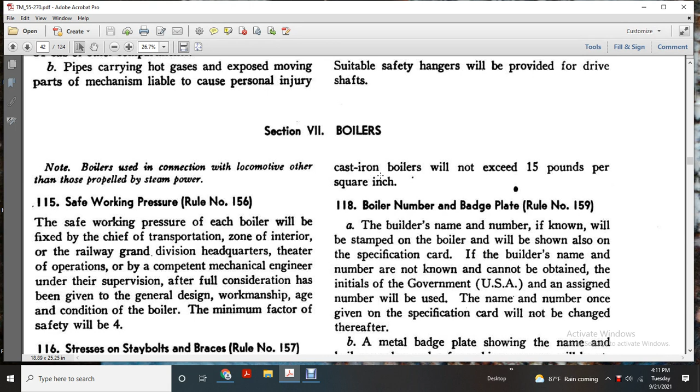Alright, Section 7, Boilers. Note, boilers used in connection with the locomotive other than those propelled with the steam power. Safe working pressure. Rule number 156. Safe working pressure. Each boiler will be fixed with the Chief Transportation Zone interior of the Railway Grand Division Headquarters Theater operation or by competent mechanical engineer under the supervision.

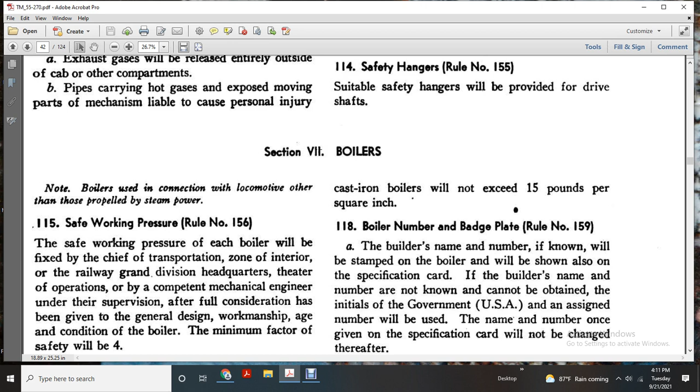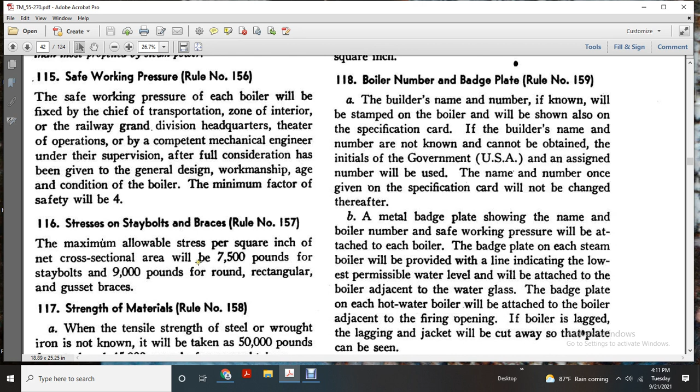After full consideration has been given the general design, workmanship, age and condition of the boiler, minimum factor of safety will be 4. 116. Stress on stay bolts and braces. Rule number 157. The maximum allowable stress per square inch on a net cross-sectional area will be 7,500 pounds for stay bolts, 9,000 pounds for round rectangular gusset braces.

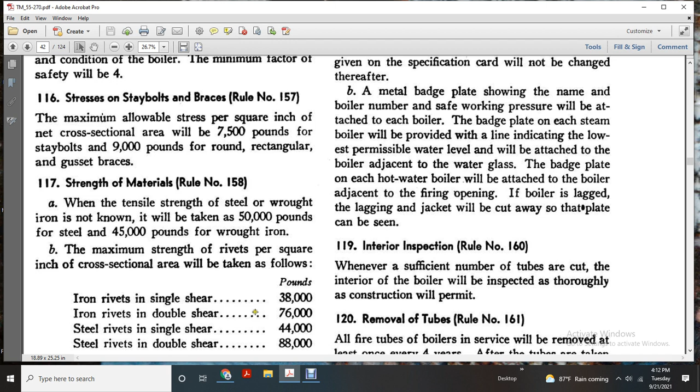117. Strength of the materials. Rule number 158. When tensile strength of the steel or wrought iron is not known, it will be taken at 50,000 pounds for steel and 45,000 pounds for wrought iron. The maximum strength of the rivets per square inch of cross-sectional area will be taken as follows. Rivet single shear 38,000, double shear 76, steel rivet single shear 44, double shear 88.

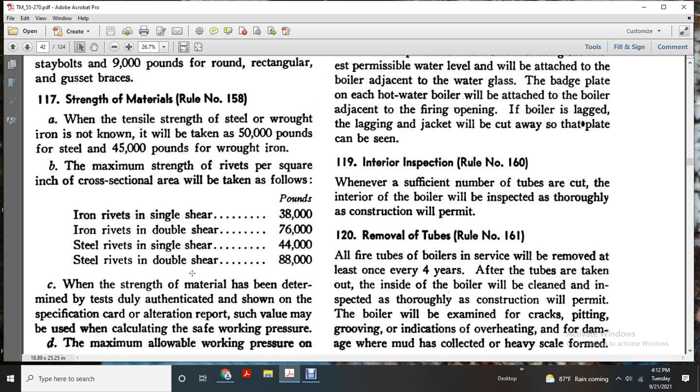When the strength of the material is determined by test of duly authenticated shown over the specification, alteration report such value when calculating the safe working pressure. Maximum allowable working pressure on cast iron boilers will not exceed 15 pounds per square inch.

118. Boiler number on a badge plate. Rule number 159. The builder's name with the number, if known, will be stamped on the boiler and shown on the specification card. If the builder's name with the number is not known or cannot be obtained, the initials of the government, USA, and an assigned number will be used. The name and number once given on the specification card will not be changed thereafter.

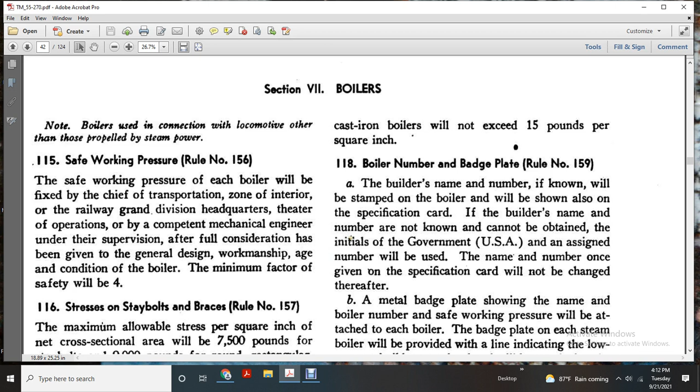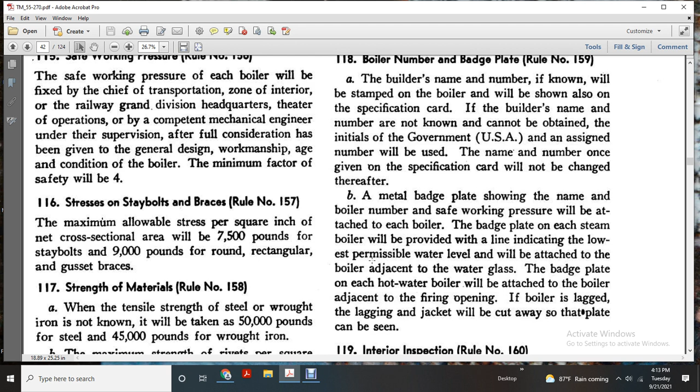A metal badge plate showing the name of the boiler with the number and the safe working pressure will be attached to each boiler. A badge plate with each steam boiler provided with a line indicating lowest permissible water level will be attached to the boiler adjacent to the water glass. The badge plate with each hot water boiler will be attached to the boiler adjacent to the firing opening. The boiler's lagging jacket will be cut away so the plate can be seen.

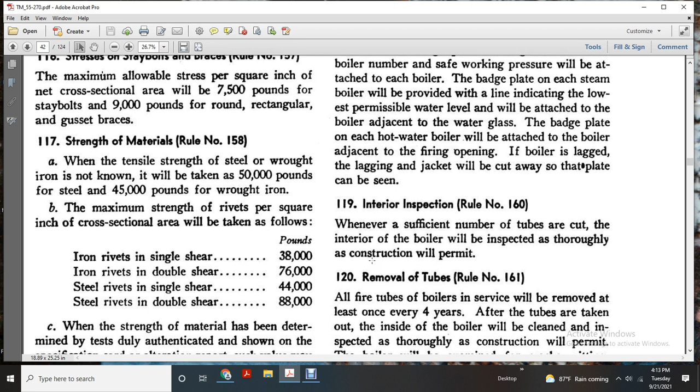119. Interior inspection. Rule number 160. Whenever a sufficient number of tubes are cut, the interior of the boiler will be inspected as thoroughly as construction will permit. 120. Removal of tubes. Rule number 161. All fire tubes of the boiler will be removed at least once every 4 years. After the tubes have been taken out, the inside of the boiler will be cleaned and inspected thoroughly as the construction will permit.

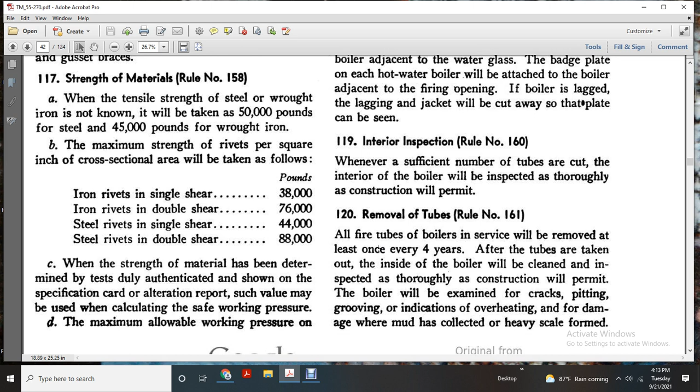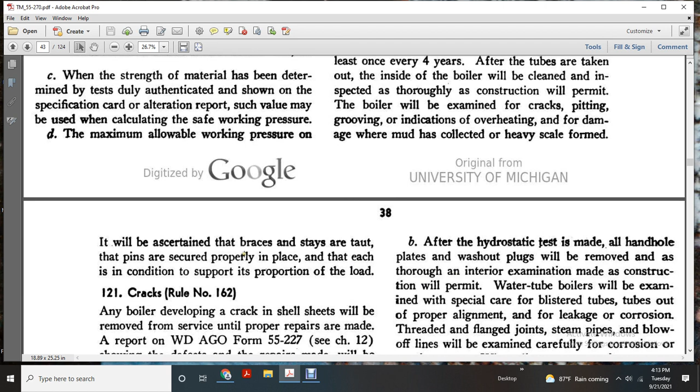Boiler will be examined for cracks, pitting, grooving, and indication of overheating and damage wherever mud has collected or heavy scale formed. It will be ascertained that the braces and stays are taut, with the pins secured properly in place, and that each is in condition to support its proper proportion of the load.

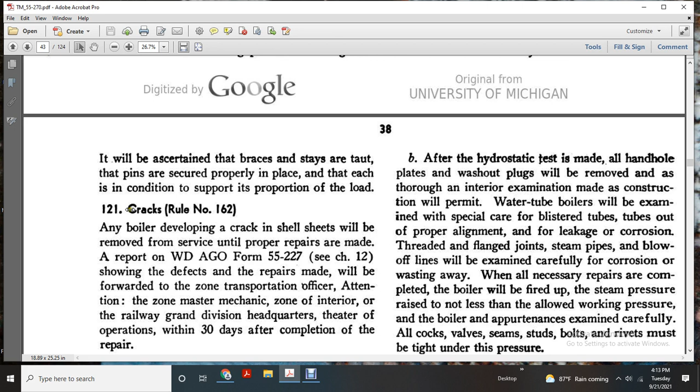121. Cracks. Rule 162. Any boiler developing a crack in the shell sheet will be removed from service until the proper repairs are made. A report on WD AGO Form 55-227, Chapter 12, showing the defect and the repairs made will be forwarded to the zone transportation officer, attention zone master mechanic, zone interior, or the railway grand division headquarters, theater of operations, 30 days after the completion of the repair.

Fusible plugs. 122. Rule number 163. Boilers equipped with a fusible plug will be filled with tin of not less than 99% purity, containing no more than 1/10 of 1% of lead and no more than 1/10 of 1% zinc. Fusible plugs will be removed and refilled at least once every year and such action will be shown on the report of inspection,

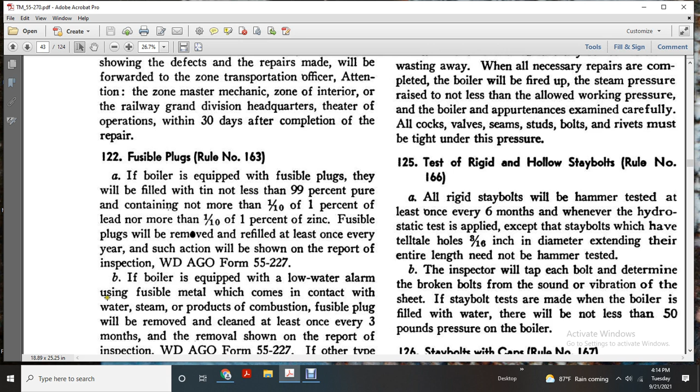AGO Form 55-227. If the boiler is equipped with a low water alarm using fusible metal which comes in contact with the water, steam, or products of combustion, the fusible plug will be removed and cleaned at least once every 3 months. Removal is shown on the report of inspection, AGO Form 55-227, and any other type of low water alarm used will be inspected and tested at least once every 3 months, with the condition shown on the report of inspection, AGO Form

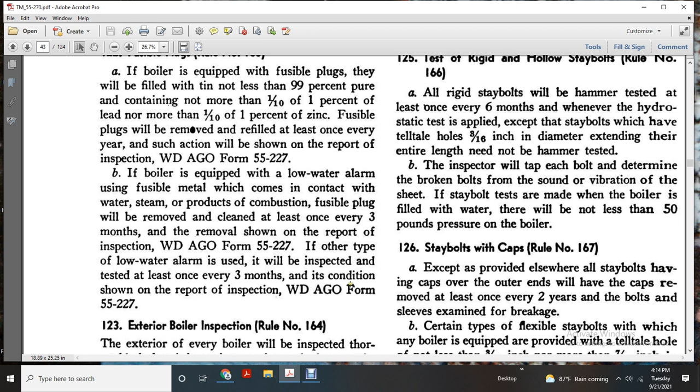55-227. 123. Exterior boiler inspection. Rule number 164. The exterior of every boiler will be inspected thoroughly before it is put in service whenever the jacket, lagging, or casing are removed.

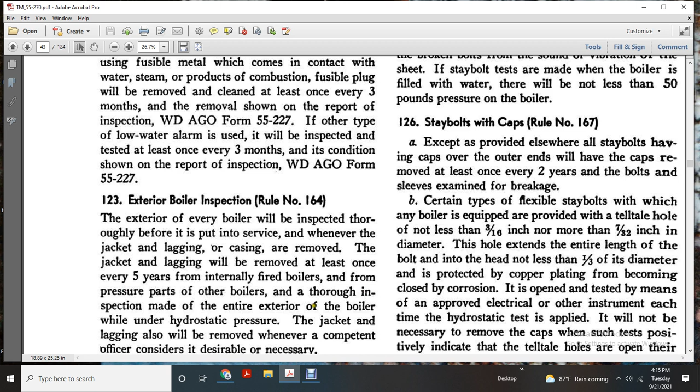The jacket lagging will be removed at least once every 5 years. For internally fired boilers, the pressure parts of other boilers will be thoroughly inspected, with the exterior of the boiler under the hydrostatic pressure. The jacket with the lagging will be removed whenever the inspector considers it desirable and necessary.

After the hydrostatic test is made, the hand hole plates and washout plugs will be removed and a thorough interior examination made as the construction will permit. Water tube boilers will be examined with special care for blistered tubes, tubes out of proper alignment, leaks, and corrosion. Flange joints, steam pipes, and blow-off lines will be examined carefully for corrosion wasting them away.

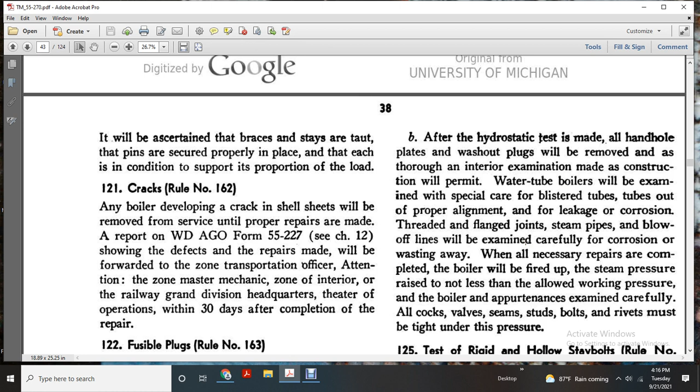When all necessary repairs are completed, the boiler will be fired up to a pressure not less than the allowable working pressure of the boiler, and the inspector will examine carefully all cocks, valves, seams, studs, bolts, and rivets, which must be tight under this pressure.

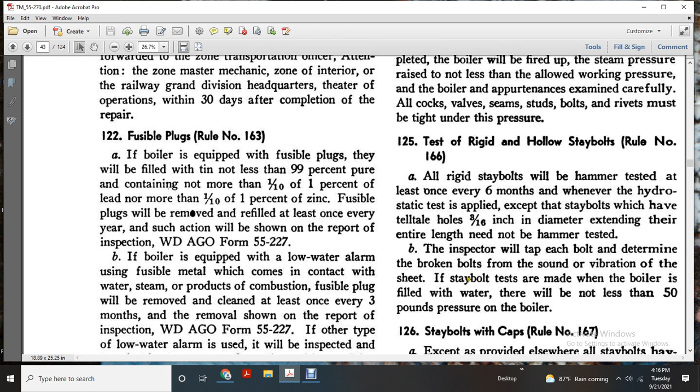125. Test of rigid and hollow stay bolts, rule number 166. All rigid stay bolts will be hammer tested at least once every 6 months and whenever the hydrostatic test is applied, except stay bolts having a telltale hole 3/16 of an inch in diameter extending their entire length, which are not to be hammer tested. Inspectors will tap each bolt to determine broken bolts by the sound or vibration of the sheet. If stay bolt tests are made when the boiler is filled with water. There will be not less than 50 pounds of pressure on the boiler.

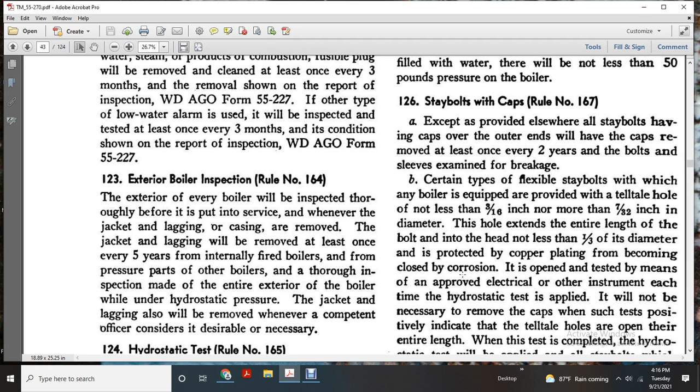126. Stay bolts with caps, rule number 167. Except as provided elsewhere, stay bolts that have caps over the outer end will have the caps removed at least once every 2 years, and the bolts and sleeves examined for breakage. Certain types of flexible stay bolts may be provided with a telltale hole not less than 3/16 of an inch nor more than 7/32 of an inch in diameter, extending the entire length of the bolt and into the head not less than 1/3 of its diameter, protected from becoming closed by corrosion, opened and tested by means of an electrical or other instrument each time the hydrostatic test is applied.

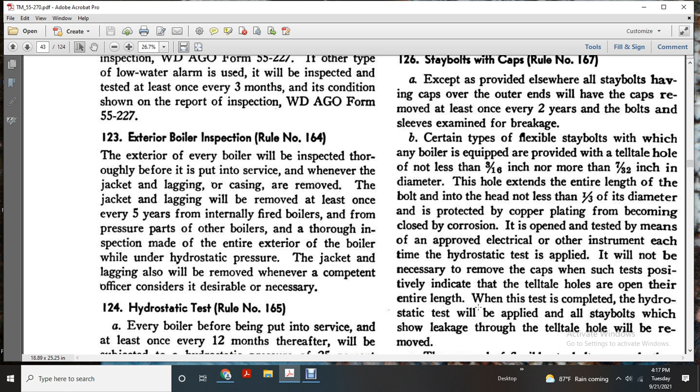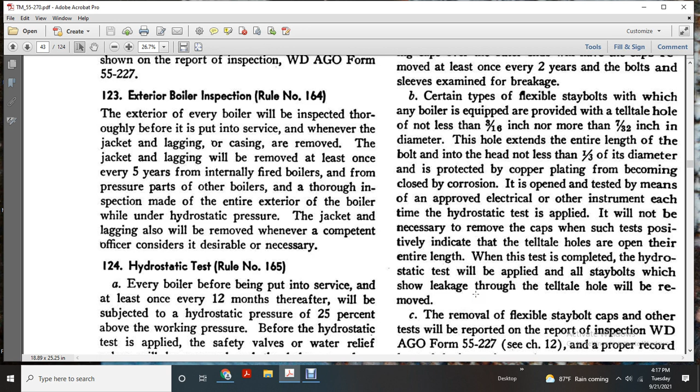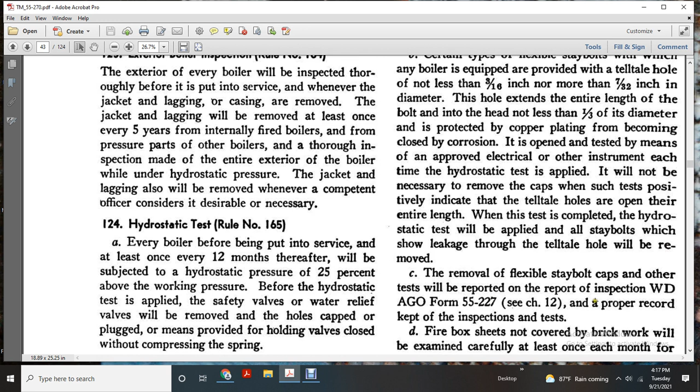It will not be necessary to remove the caps if the test positively indicates the telltale holes are open their entire length. When the test is complete, the hydrostatic test will be applied, and all stay bolts showing leakage through the telltale hole will be removed. The removal of the flexible stay bolt caps and the test will be reported on the inspection report, WD AGO Form 55-227, Chapter 12, with proper record of the cap inspection and test.

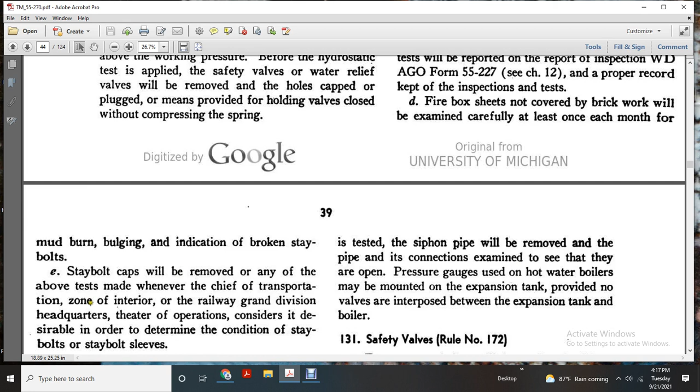D. Firebox sheets not covered by brickwork will be examined carefully at least once each month for mud burn, bulging, or indication of broken stay bolts. Stay bolt caps can be removed or any of the above tests made whenever the chief of transportation, zone, railway grand division headquarters, or theater of operations considers it desirable to determine the condition of stay bolts and stay bolt sleeves.

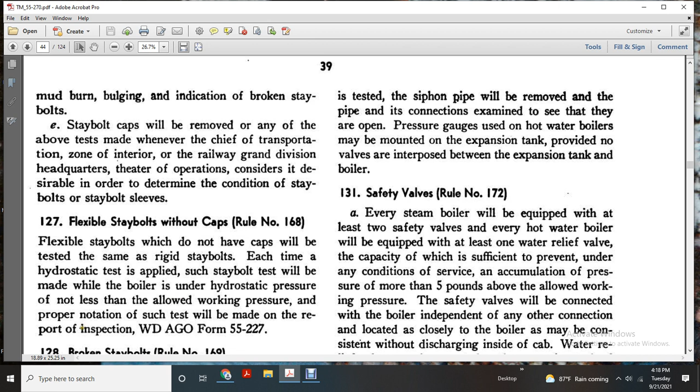127. Flexible stay bolts without caps. Rule number 168. Flexible stay bolts that do not have caps will be tested the same as rigid bolts each time the hydrostatic test is applied, and each such stay bolt test will be made with the boiler under hydrostatic pressure not less than the allowed working pressure. Proper notation of such tests will be made on the inspection report, WD AGO Form 55-227.

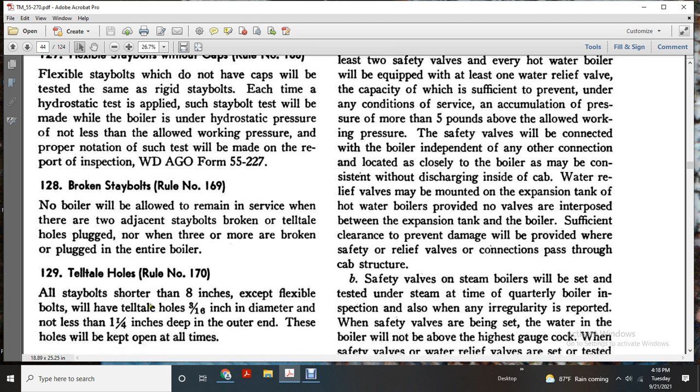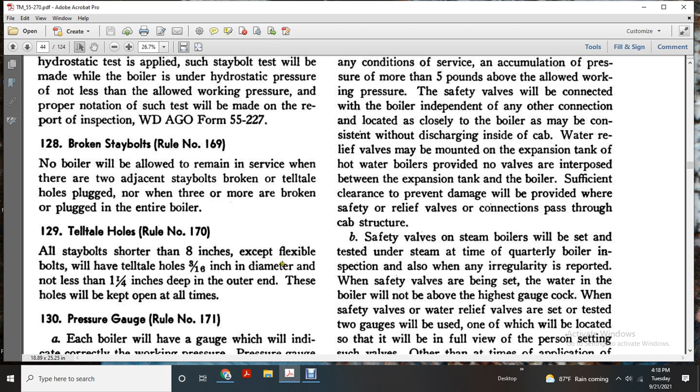128. Broken stay bolts, rule number 169. No boiler is allowed to remain in service when there are 2 adjacent stay bolts broken or telltale holes plugged, or when there are 3 or more broken or plugged in the entire boiler. 129. Telltale holes, rule number 170. All stay bolts shorter than 8 inches, except flexible bolts, will have telltale holes 3/16 of an inch in diameter and not less than 1 1/4 inch deep in the outer end.

These holes will be kept open at all times. 130. Pressure gauge, rule number 171. Each boiler will have a gauge which will indicate the working pressure correctly, graduated to not less than 1.5 times the allowed working pressure for the boiler.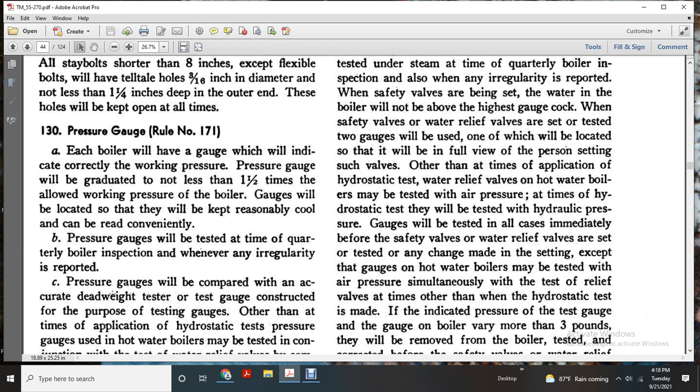Gauges will be located so that they will be kept reasonably cool and can be read conveniently. Pressure gauges will be tested at the time of the quarterly boiler inspection and whenever irregularity in pressure is reported. Pressure gauges will be compared with an accurate dead weight tester or test gauge constructed for the purpose of testing gauges.

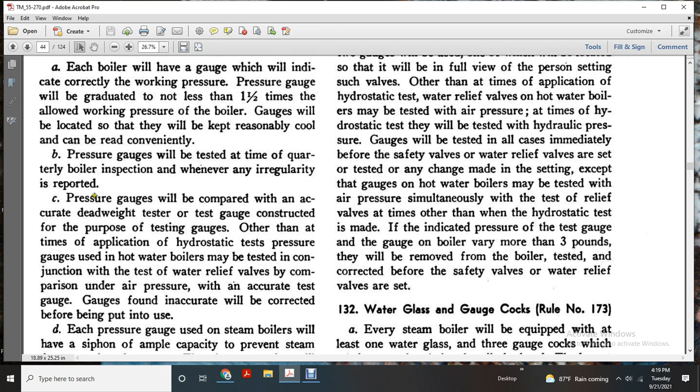Other than at the time of application of the hydrostatic pressure, the gauges in use on hot water boilers may be tested in conjunction with the test of the water relief valve by comparison under air pressure with an accurate test gauge. Gauges found inaccurate will be corrected before being put to use. Each pressure gauge of a steam boiler will have a siphon of ample capacity to prevent steam from entering the gauge. The pipe connection will be direct into the boiler, maintained steam tight between the boiler and the gauge.

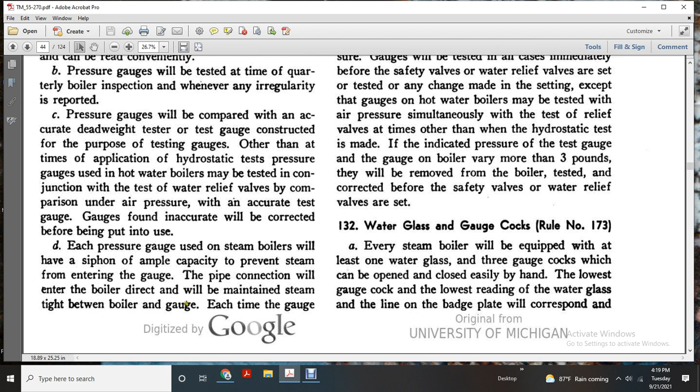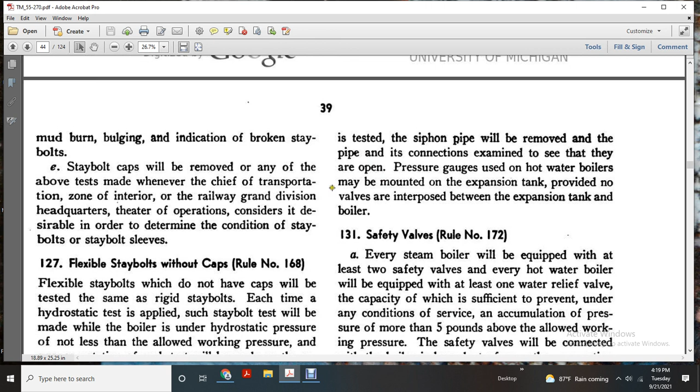Each time the gauge is tested, the siphon and pipe connections will be removed and examined to see that they are open. Pressure gauges used for hot water boilers may be mounted on the expansion tank, provided no valve is interposed between the expansion tank and the boiler.

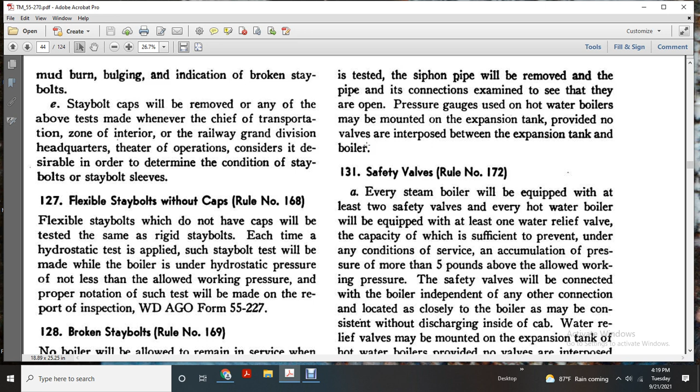131. Safety valve, rule number 172. Every steam boiler will be equipped with at least 2 safety valves. Every hot water boiler will be equipped with at least one water relief valve with a capacity sufficient to prevent, under any conditions, an accumulation of pressure of more than 5 pounds above the allowed working pressure. Safety valves will be attached to the boiler independently of any other connection, located as close to the boiler as may be consistent, without discharge inside.

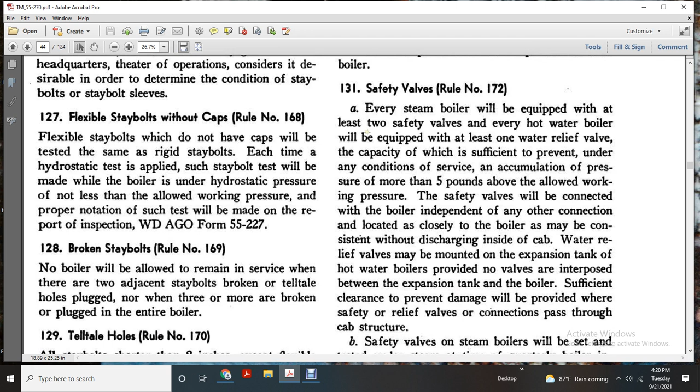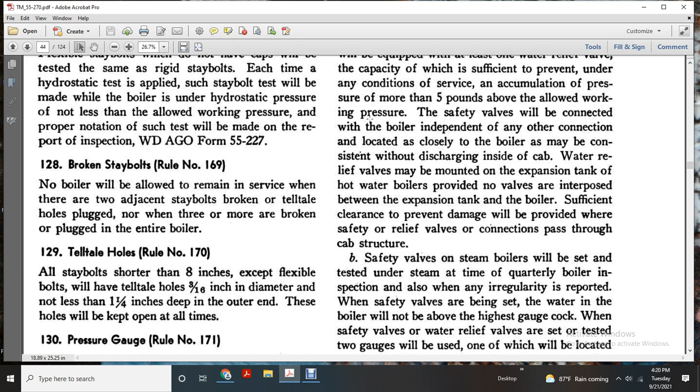Water relief valves may be mounted on the expansion tank of hot water boilers, provided no valves are interposed between the expansion tank and the boilers. Sufficient clearance to prevent damage will be provided where safety relief valve connections pass through the cab structure. Safety valves on steam boilers will be set and tested under steam at the time of the quarterly boiler inspection.

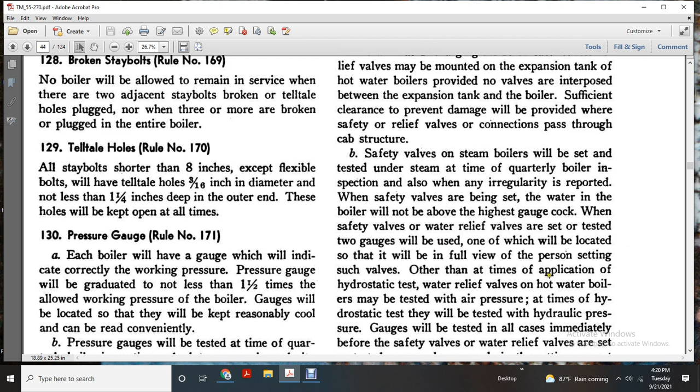Also, when irregularity is reported. When safety valves are being set, the water in the boiler will not be above the highest gauge cock. When safety valves or water relief valves are to be set and tested, 2 gauges will be used, one of which will be located so that it will be in full view of the person setting such valves. At times other than the application of hydrostatic pressure, water relief valves on hot water boilers will be tested with air pressure. The gauges will be tested and compared immediately before safety valves or water relief valves are set, and any change made in the setting.

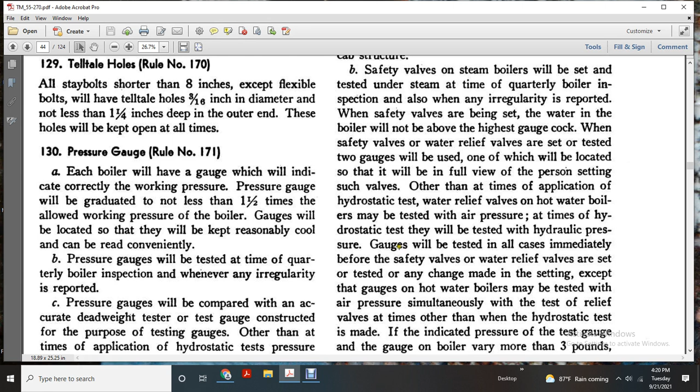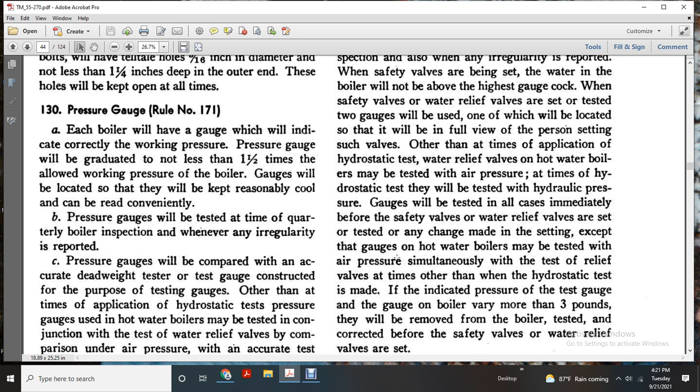The gauges on hot water boilers may be tested with air pressure simultaneously with the test of the relief valve at all times other than when the hydrostatic test is made. If the indicated pressures of the gauges on the boiler vary more than 3 pounds, they will be removed from the boiler and tested and corrected before safety valves and water relief valves are set.

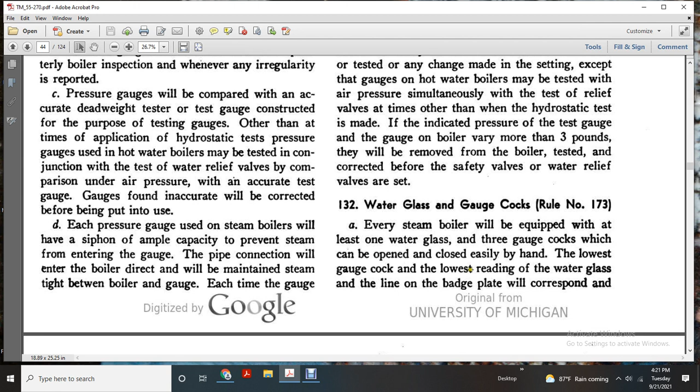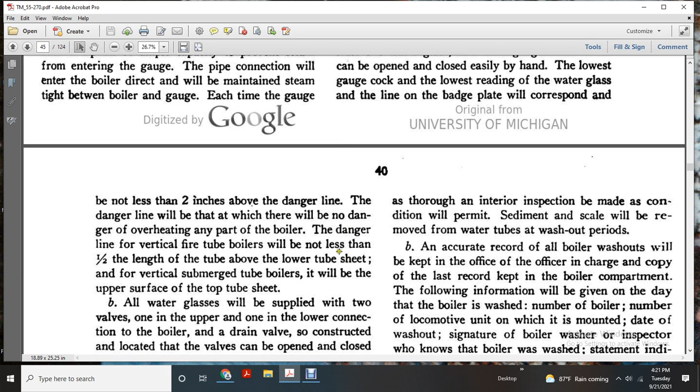Alright, 132, water glass and gauge cock, rule number 173. Every steam boiler will be equipped with at least one water glass and 3 gauge cocks, which can be opened and closed easily by hand. The lowest gauge cock and the lowest reading of the water glass will correspond with the badge plate, not less than 2 inches above the danger line, the danger line being where there is no danger of overheating any part of the boiler. The danger line of vertical fire tube boilers will be not less than 1/2 the length of the tube above the lower tube sheet; for vertical submerged tube boilers it will be the upper side of the top tube sheet.

All water glasses will be supplied with 2 valves, with 1 upper and 1 lower connection to the boiler, and a drain valve, constructed and located so that the valves can be opened and closed easily by hand.

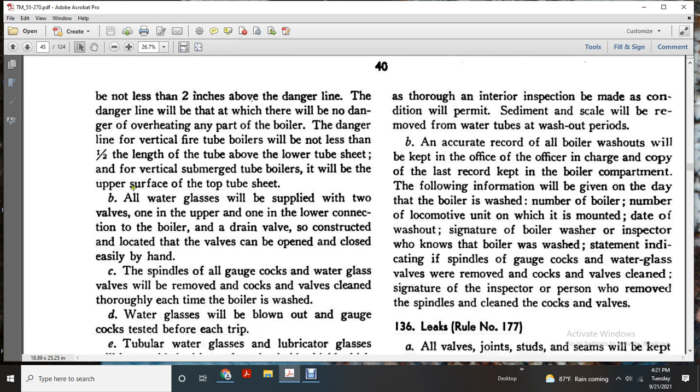Spindles of all the gauge cocks, water glasses, and valves will be removed with the cocks and valves cleaned thoroughly each time the boiler is washed out. Water glasses will be blown out with the gauge cocks tested at each trip.

Tubular water glasses and lubricator glasses will be provided with a safe and suitable shield that will permit the glasses to be easily seen and prevent the glass from flying in case of breakage. Water glasses and pressure gauges will be illuminated sufficiently to ensure accurate readings can be made.

Rule 133, feedwater appliances, rule number 174. Feedwater appliances and connections will be in good condition, free of leaks, and free of the accumulation of scale or other foreign matter, and will be tested before each trip.

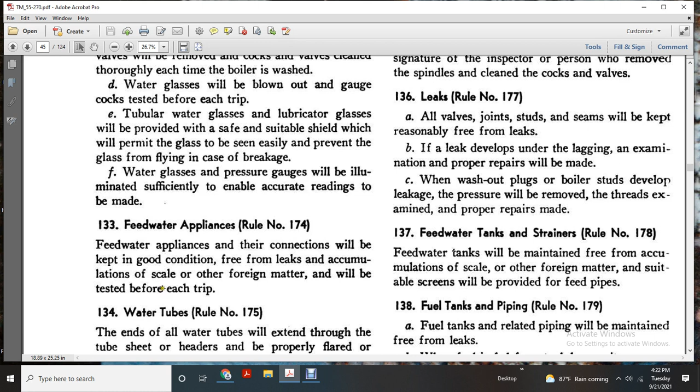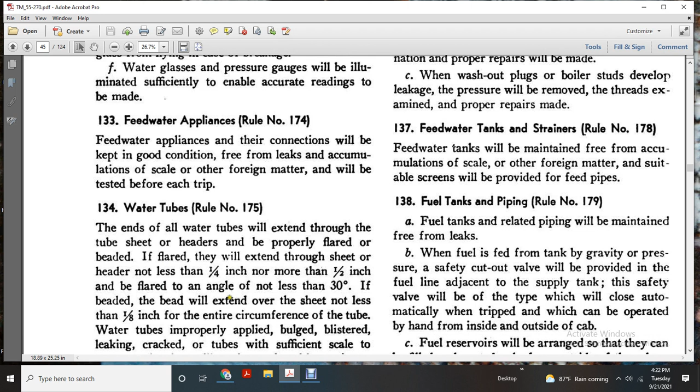Water tube, rule 175. Ends of water tubes extended through the tube sheet will have the head properly flared. The flared head will extend through the sheet not less than 1/4 inch, no more than 1/2 inch, and will be flared at an angle of not less than 30 degrees. Beaded ends will extend over the sheet not less than 1/8 inch for the entire circumference of the tube.

Where a water tube is improperly applied but shows a bulge, blister, leak, or crack, or the tube is sufficiently scaled to cause overheating, it will not be continued in service.

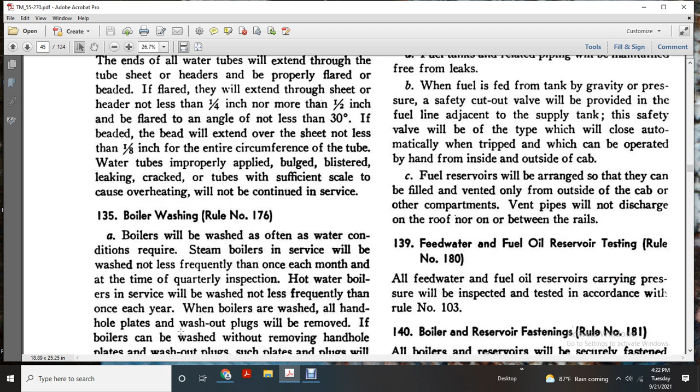the handhole plates and washout plugs will be removed. If the boilers are washed out without removing the handhole plates or washout plugs, such plates and plugs will be removed immediately after the boiler is washed.

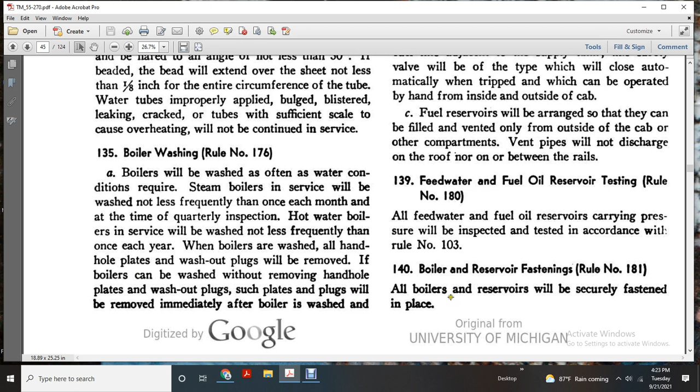As thorough an interior inspection as condition will permit, the sediment and scale will be removed from water tubes at washout periods.

Accurate records of all boiler washouts will be kept by the officer in charge, with a copy of the last record kept in the boiler compartment. The following information will be given: the time and day the boiler was washed, the number of the boiler, the number of the locomotive unit on which it is mounted, the time and day of the washout, the signature of the boiler washer or inspector who knows that the boiler was washed, a statement indicating the spindles of the gauge cocks and water glasses and valves were removed and the cocks and valves cleaned, and the signature of the inspector or personnel who removed the spindles and cleaned the cocks and valves.

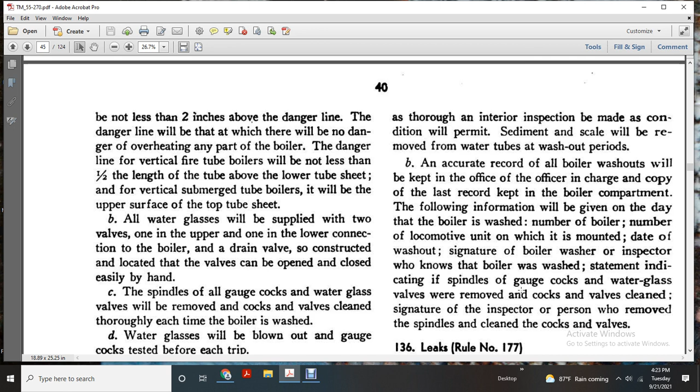136, leak rules, rule number 177. All valves, joints, studs, and seams will be kept reasonably free of leaks.

If a leak develops under the lagging, upon examination proper repairs will be made. When washout plugs or boiler studs develop leakage, the pressure will be removed, the threads examined, and proper repairs made.

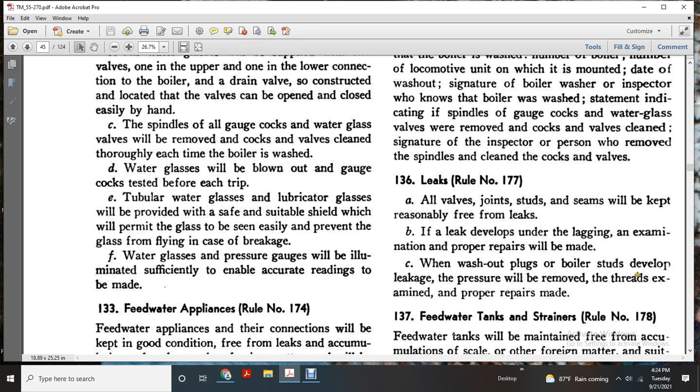137, feed water tanks, strainers, rule number 178. Feed water tanks will be maintained free of the accumulation of scale or other foreign matter, and a suitable screen will be provided for feed pipes.

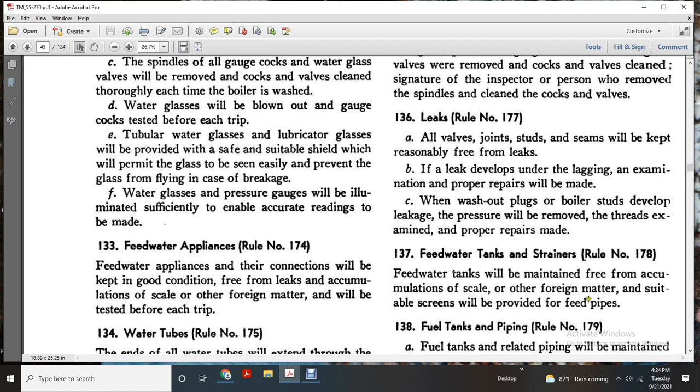138, fuel tanks and piping, rule number 179. Fuel tanks and related piping will be maintained free of leaks.

If the fuel is fed from the tank by gravity or pressure, a safety cutout valve will be provided in the fuel line adjacent to the supply tank. The safety valve will be of the type which closes automatically, with a trip that can be operated by hand inside or outside of the cab. The fuel reservoir vent arrangement will be such that it can be filled and vented on the outside of the cab.

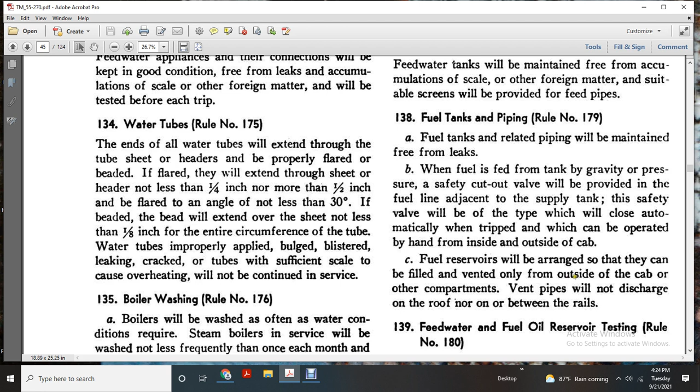Other compartments. Vent pipes will not discharge onto the roof nor between the rails.

139, feed water and fuel oil reservoir testing, rule number 180. Feed water and fuel oil reservoirs carrying pressure will be inspected and tested in accordance with rule number 103.

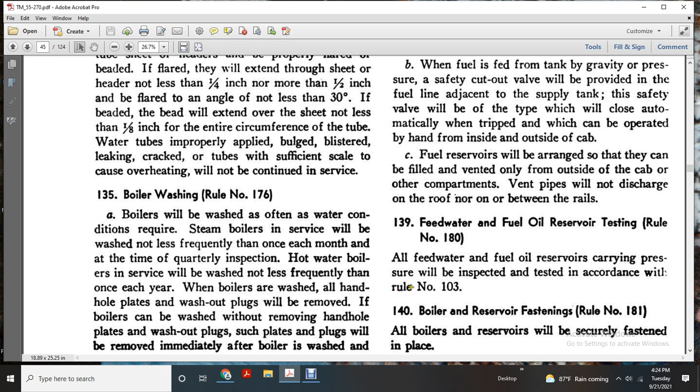Boiler and reservoir fastening, rule number 181: all boilers and reservoirs will be securely fastened in place.

Steam headers, rule number 182: when two boilers are connected with a steam header, each will have a suitable valve between the boiler and the header.

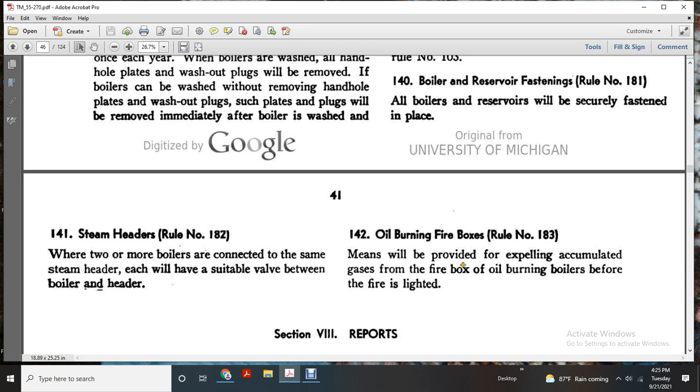142, oil burning firebox, rule number 183. Means will be provided for expelling accumulated gas in oil burning firebox boilers before the fire is lit.